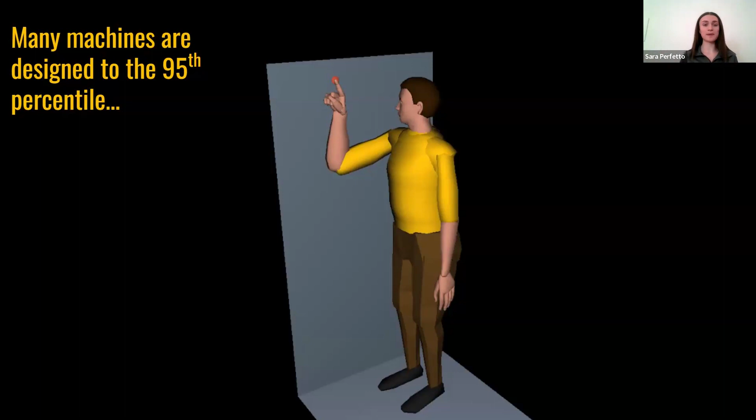Now, a lot of machines in the mining industry are often designed to fit the 95th percentile, or the tallest 95% of people. This can be beneficial in ensuring that no one's going to hit their head when getting into a machine. Issues start to arise when we have operators who are a little bit smaller than this 95th percentile. So on the screen right now, I have an image of a 95th percentile operator reaching a control, that red button you see under their finger.

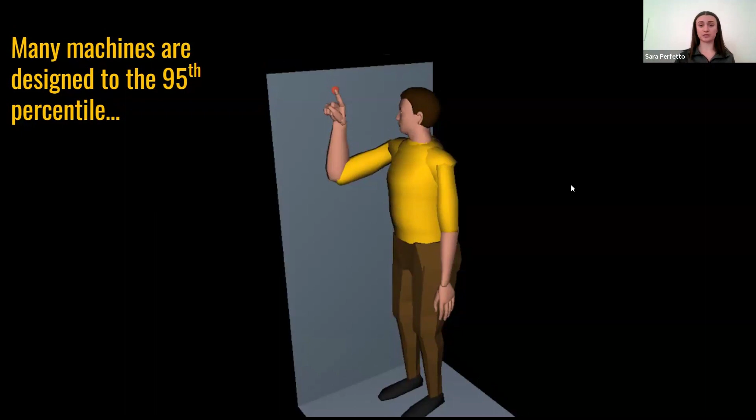As you can see, it looks pretty comfortable and easy for them to reach this control. However, if we have someone who's a little bit smaller, such as the 50th percentile operator, it looks a bit more challenging to reach. And then what about someone who's even smaller, the 5th percentile operator? Suddenly they can't reach that control at all. This concept of how our height affects our ability to reach our controls in our workplace is really what we're going to delve into today.

So the International Organization for Standardization, or the ISO, is something that I'm sure many of us are very familiar with. The ISO is responsible for developing standards relating to testing procedures, working conditions, machine design, and so much more. ISO has developed numerous standards that are recommended to be used in the mining industry.

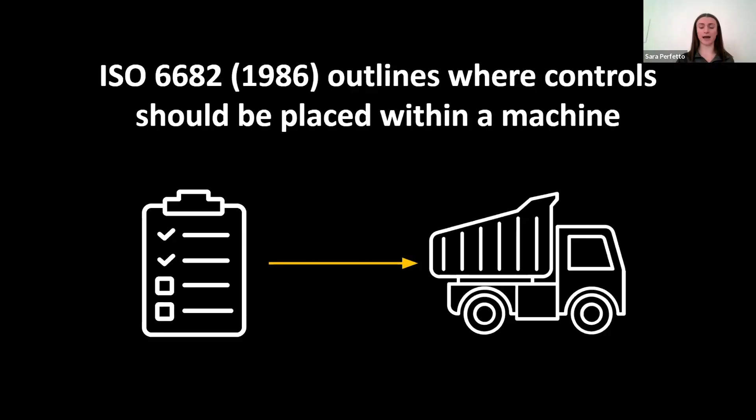One of these includes ISO 6682. This standard outlines the areas within a cab where controls should be placed in order to ensure that the majority of operators can safely and comfortably reach these controls. ISO 6682 does this by having zones in which operators should be able to reach, and they define these zones through the use of a coordinate system where the coordinates lay along the perimeter of these zones.

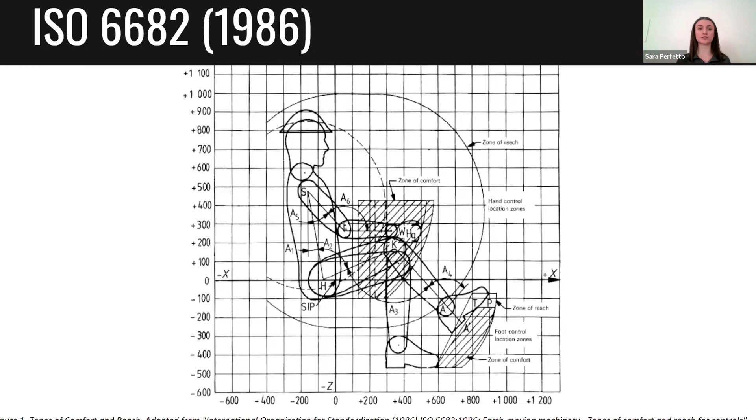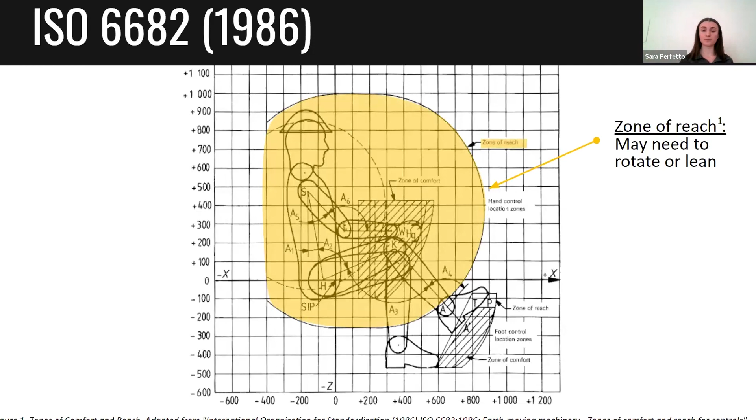So one of the zones outlined in ISO 6682 is the zone of reach. This is the area that an operator should be able to reach with bending or leaning a little bit in the trunk. And the second zone is the zone of comfort. This is the zone that we are going to be discussing today. This is the area that operators should be able to reach without bending at all, and this is where we tend to find controls that we use more often, so things like steering wheels, brakes, and speed controls.

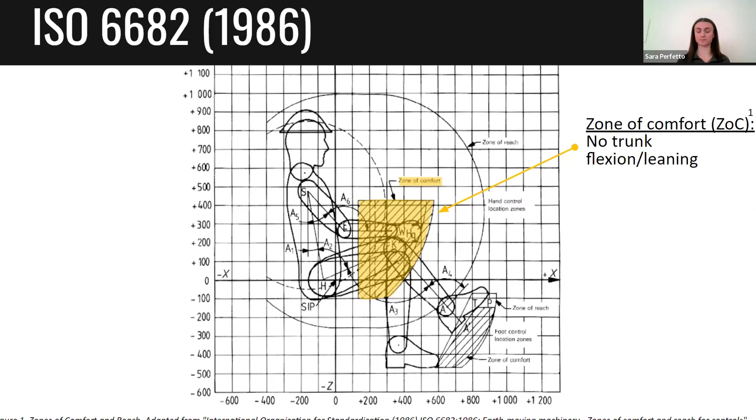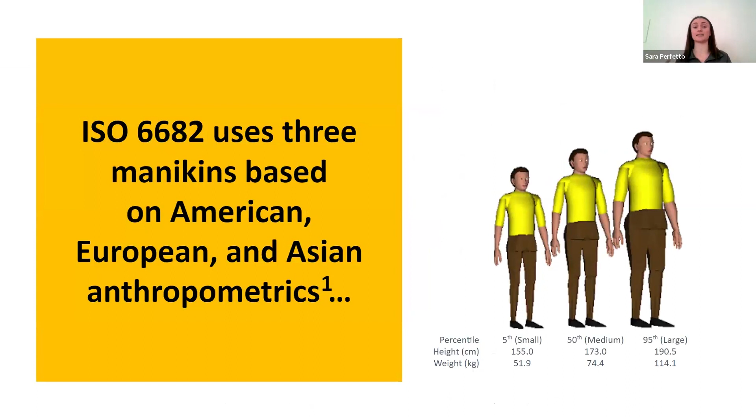Now, ISO 6682 is based off of 3 different operators or 3 manikins. These are shown on the right in the yellow t-shirt, so the small, medium, and large operators. These operators were based off of male and female data from American, European, and Asian populations. However, previous work has found that Indigenous Canadians and Latino individuals make up a large portion of the Canadian working population, and more specifically in the mining industry. When we look at the range of heights used in ISO 6682, the yellow t-shirts, we can see that it might not be the case that everyone is represented within that range of heights.

When we have cabs that don't take a wide range of individuals into account, this creates a barrier to equity, diversity, and inclusion, or EDI. Equity refers to the recognition and elimination of barriers and providing individuals with differing levels of support in order to ensure that everyone has fair and equal access to opportunities and resources. Diversity relates to the mix of representation within a workforce.

It relates to a wide range of aspects, which include, but certainly are not limited to, things like age, sex, ethnicity, sexual orientation, physical ability, and so much more. Finally, inclusion refers to the degree to which individuals of all social classes or social groups have the ability to feel involved, engaged, heard, appreciated in their workplace, thus contributing to an overall sense of belongingness.

Now, when we improve EDI in the workplace, such as through the use of more inclusive standards and cab design, previous work has found that there are numerous benefits to this. Some of these include increases in cultural competency and humility amongst employees. It has been found to improve job satisfaction and sales revenue, as well as promote trust and sense of belonging amongst employees, and improve workplace innovation.

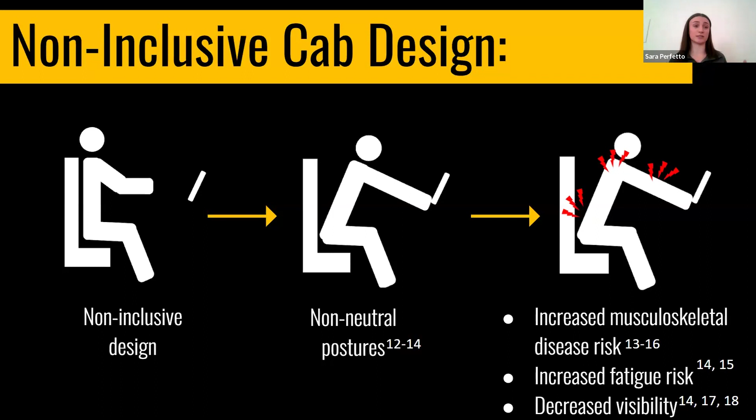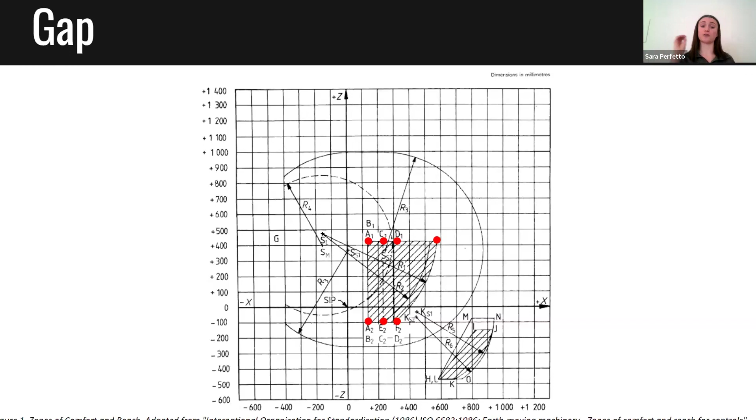So the gap that we really find here is that while ISO 6682 is recommended to be used in the mining industry to determine where controls should be placed within a machine, no work has yet validated the location of the coordinates outlining the zone of comfort in relation to the cabs used in the mining industry, the operators, and the operators' reach envelopes, or what they can reach.

Thus, the study consisted of 3 different objectives. The first was to examine the location of the coordinates defining the zone of comfort in relation to 4 different machines. The second was to compare the location of the coordinates in relation to a variety of operators' reach envelopes. And finally, the third objective was to examine the location of the coordinates with respect to both the design of the cab and the operator's reach envelopes.

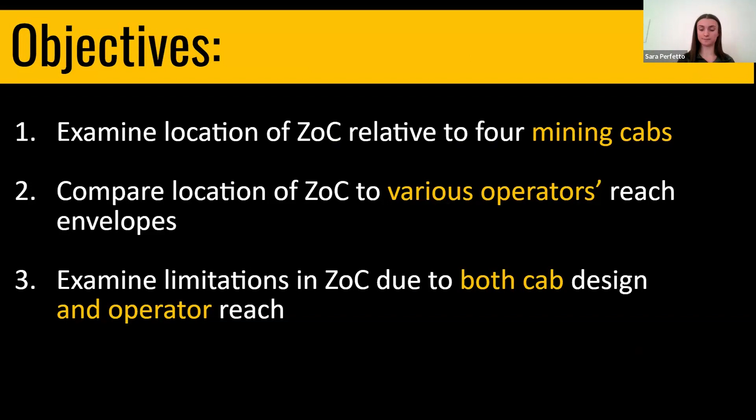So as I alluded to in the beginning, Jack is a human simulation software that can be used to create virtual work environments, as well as little virtual humans, which we call mannequins in Jack. You can place these mannequins into a work environment, have them do a range of tasks, and then analyze how performing that task affects them and their body.

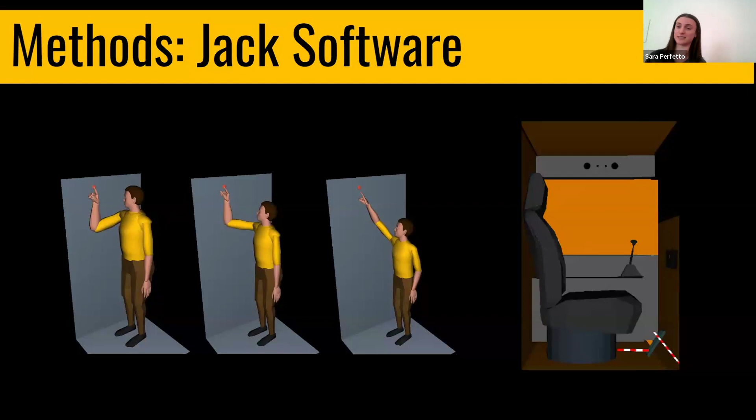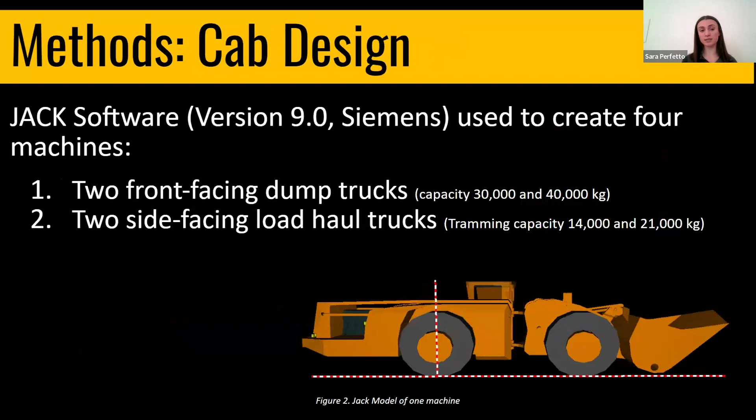This is the software we used for the study, and it's also the software I used for the example in the beginning with the 3 mannequins and the control. Jack was used to create 4 machines for the study, consisting of 2 front-facing dump trucks and 2 side-facing load haul trucks.

Jack was also used to create the coordinates outlined in ISO 6682. In ISO 6682, they outline 12 coordinates on one side of the body, and they say to get the full range of coordinates you just flip the coordinates along the y-axis. So from this point on in the study, there are 24 coordinates, each with either an R or an L at the end to indicate whether it's on the left or right side.

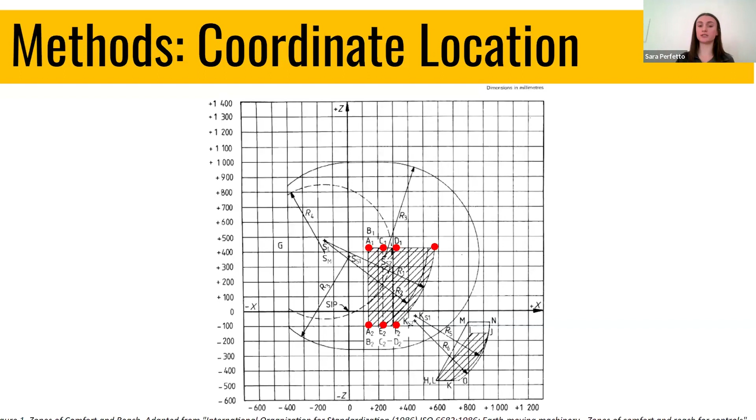In ISO 6682, each of the coordinates is defined as its distance from a certain point, the seat index point. So in Jack, we could go in and define the seat index point as coordinate 0, 0, 0, and then place each of the coordinates at their defined distance from the seat index point.

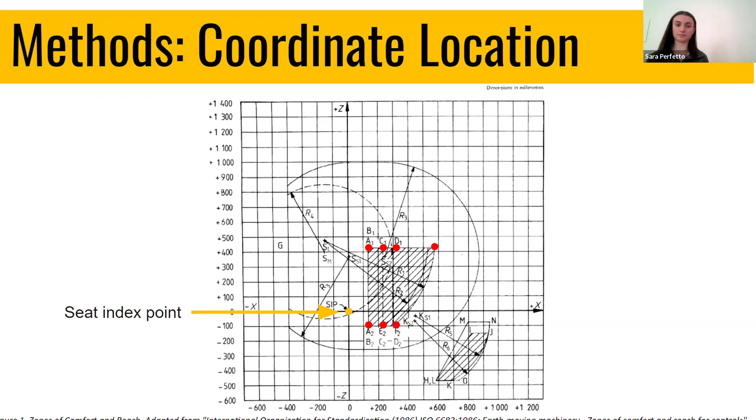The study examined 5 different operators, or 5 mannequins. These include the 3 ISO operators, the small, medium, and large operator, which correspond to the 5th, 50th, and 95th percentile. We also included the 5th percentile Latino and Indigenous females, because when we look at the range of heights included in ISO 6682, these 2 are the only ones within the sample that don't fall within that range of heights.

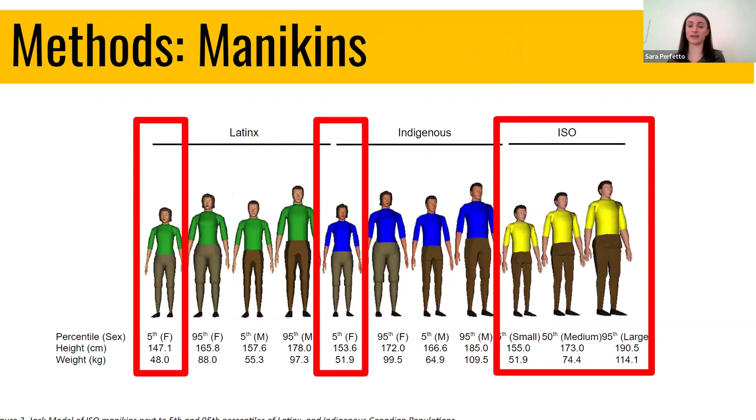For many of us, when we get into a cab or a car, hopefully one of the first things we do is adjust our seat so that everything's comfortable and we can reach things. We wanted to ensure that the manikins in this study were placed in a way most representative of what would occur in real life.

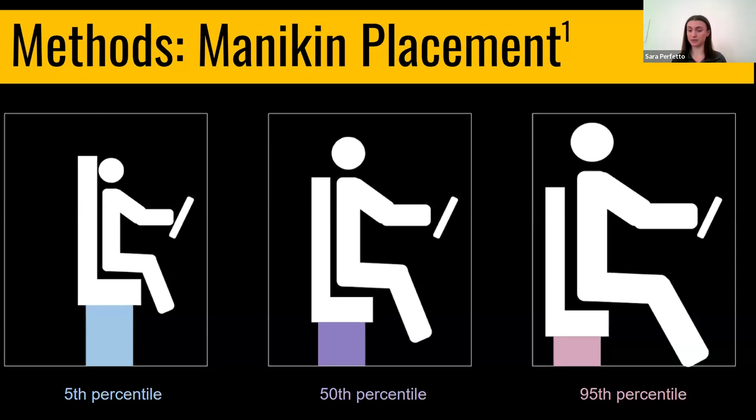To do this, we adjusted the position of the seat based on distances set in ISO 6682. For the 5th percentile operators, the smallest in this study, the seat was set to the highest and foremost position. For the 50th percentile operators, the seat was set to the centermost position. And for the 95th percentile operators, the largest used in this study, we set their seat to the lowest and rearmost position.

Just as a refresher, objective 1 was to examine the location of the coordinates defining the zone of comfort in relation to 4 different cabs.

To do this, the coordinates were first loaded into Jack. This is a side view of the coordinates, and they are layered behind one another, which is why you can only see 7 of the coordinates and not 24.

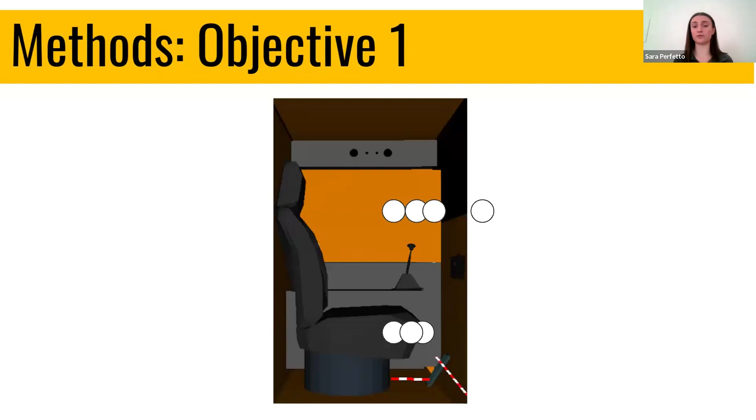Then we loaded one of the 4 cabs into Jack, and the coordinates were color-coded manually based on their location. If a coordinate fell fully outside of the cab, it was colored red. If it fell fully within the cab, it was colored green. And if it was partially in, partially out, it was colored orange. This was repeated with all 4 cabs.

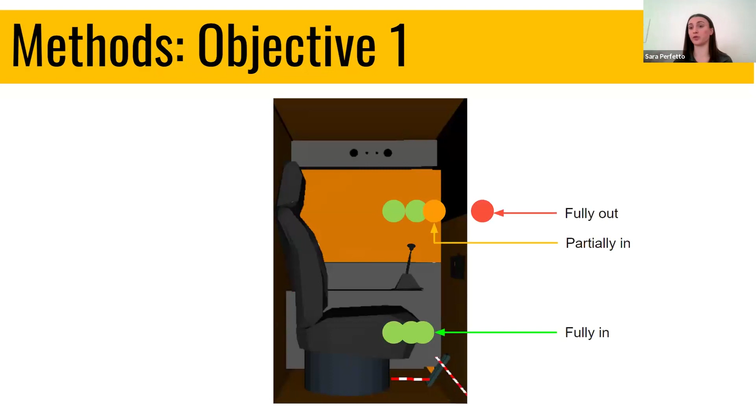For objective 2, we examined where the coordinates fell in relation to 5 different operators' reach envelopes. Once again, the coordinates were loaded into Jack. This is the front view of the coordinates, followed by an operator in the reach envelope, shown as the green circles on the screen.

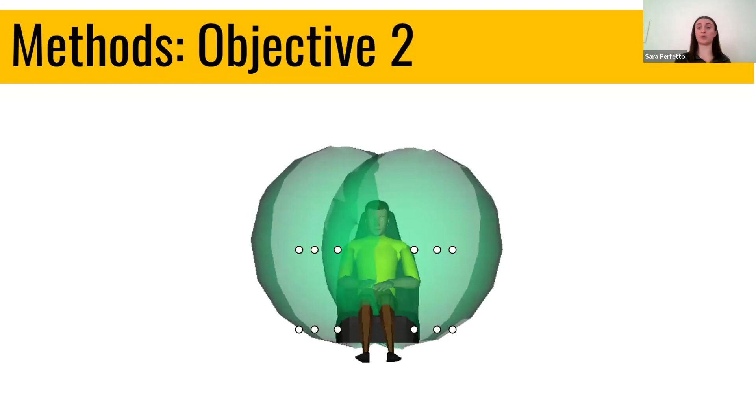This is generated through the reach analysis toolbox in Jack. The green space represents the area an operator should be able to reach based on typical joint angles and a typical arm length for someone of that height. Once again, the coordinates were color-coded based on their location.

This step was repeated twice per manikin: once without allowing them to bend or flex at all, and then a second time where they were allowed to bend either forward or sideways 20 degrees.

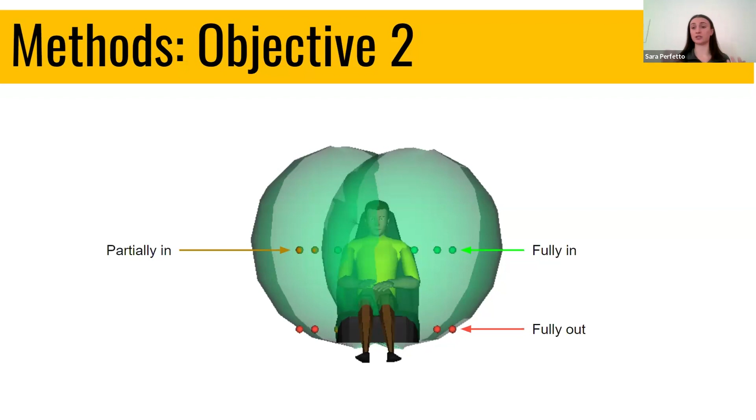For objective 3, we looked at where the coordinates fell in relation to both the cab and the operator's reach. Once again, the coordinates were loaded into Jack, followed by 1 operator, 1 cab, and their reach envelope, with everything color-coded based on location.

In each of the 4 cabs, this was done for all 5 operators, and each operator did this twice per cab.

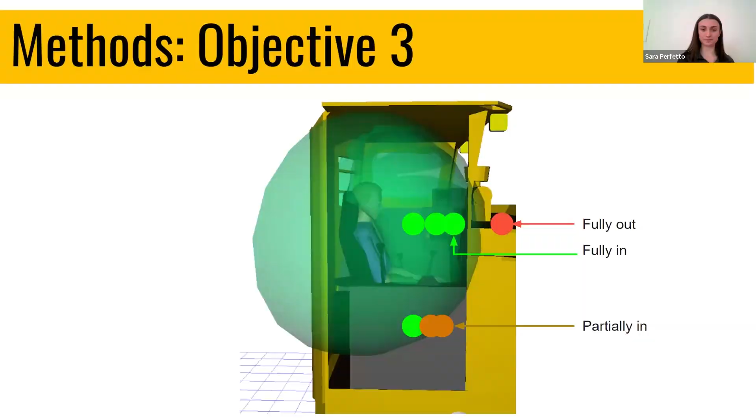When we move into the results, I want to hear the audience's hypotheses. For the first objective, across all 4 machines, what do you think was the highest percentage of points located within a cab, where these coordinates fell fully within the cab?

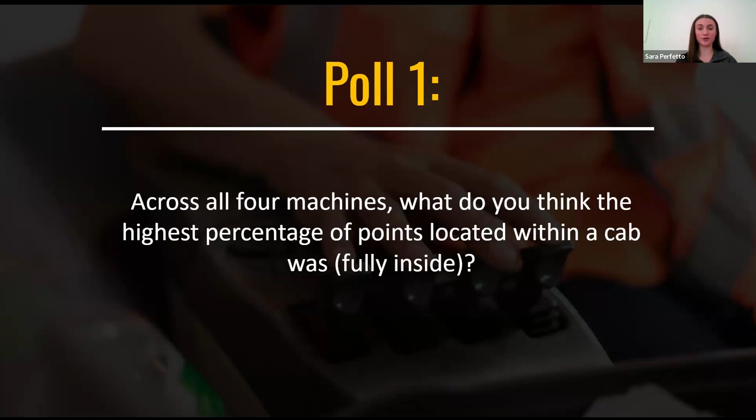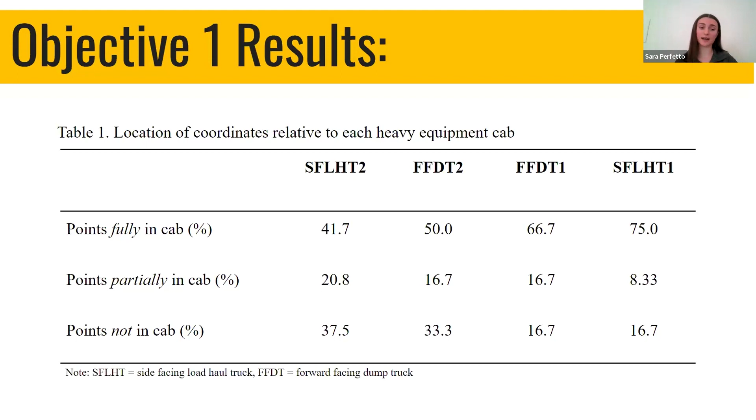Here I have the results for objective 1. Along the top, I have the 4 different machines: the side-facing load haul trucks and the forward-facing dump trucks. Along the left-hand side, I have the 3 different categories the coordinates could have fallen within.

When we look at the amount of coordinates that fell fully within the cabs, we see that the highest percentage occurred in one of the side-facing load haul trucks, where 75% of the coordinates fell fully within the cab. This amount decreases to roughly 42% for the other side-facing load haul truck.

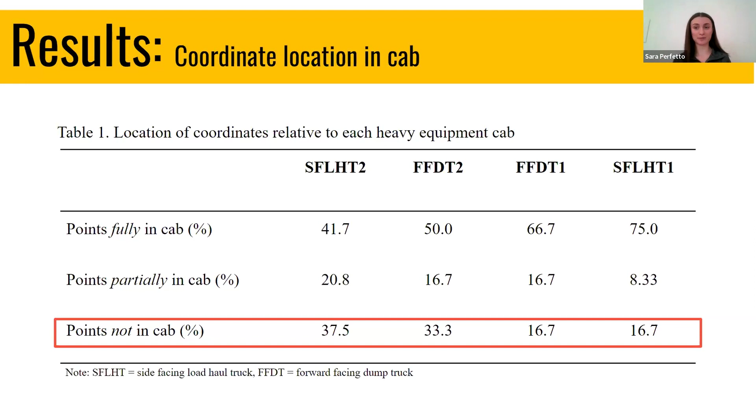However, what I really want to bring your attention to is that none of the cabs had all of the coordinates located fully within the cab, or even partially within the cab. This means that without even taking the operator and the reach into account, it would be impossible for an operator to reach the entirety of the zone of comfort in one of these 4 cabs, because part of the zone of comfort falls outside of the cab.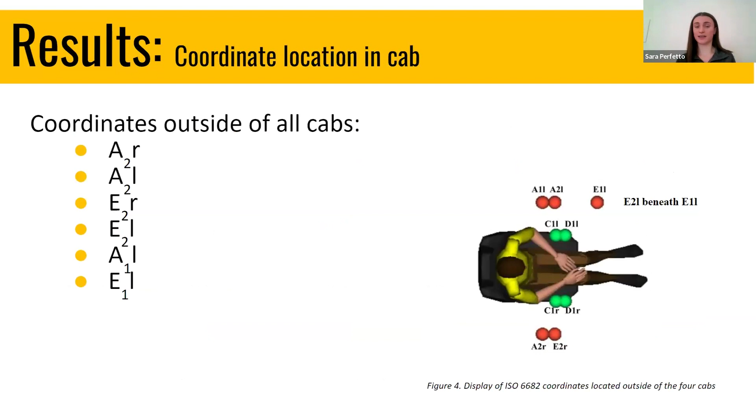There were 6 coordinates that consistently fell outside of all of the cabs. These coordinates have been highlighted on the right in red.

Moving into objective 2, which operators do you think were able to reach all of the controls, either partially or fully, without flexing or bending?

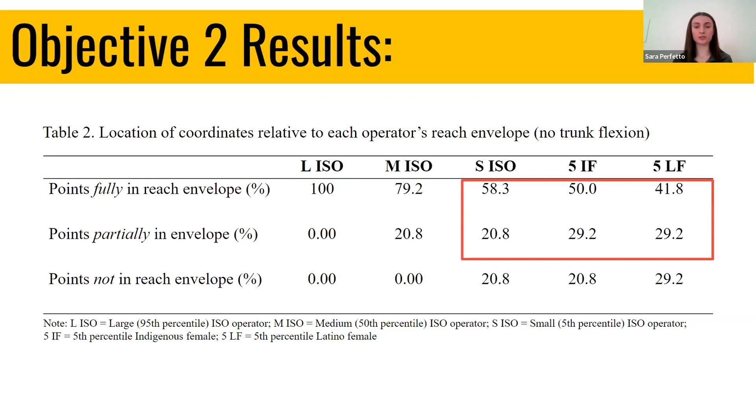All right, so once again, I think you guys got a preview. Most of us hypothesized that only the medium and large operators could reach the entirety of the zone of comfort. So I'll bring up the results for objective 2. Along the top, I have the 5 different operators. Moving from left to right, I have the large, medium, and small ISO operators, followed by the 5th percentile Indigenous female and the 5th percentile Latino female. Along the left-hand side, we have the 3 different categories. Only the large operator could fully reach 100% of the coordinates, and the medium operator could either fully or partially reach all of the coordinates. However, this was not the case for the 5th percentile operators, and I'd like to point out that this also includes the small ISO operator, who is included in the development of this standard.

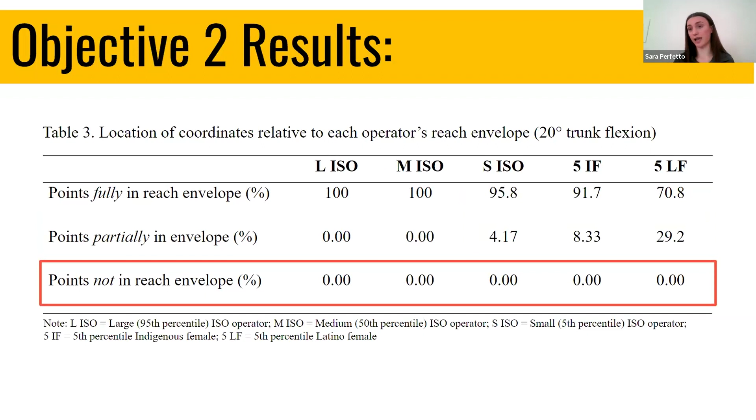When we allow the operators to bend or flex 20 degrees at the trunk, it actually becomes the case that all of the operators can either fully or partially reach all of the controls, and there are no coordinates that fall fully outside of the reach envelope for any of the operators when they're allowed to bend.

For objective 3, we had to classify the coordinates a little bit differently just due to the combination of both the cab design and the operator's reach. For a coordinate to be deemed fully accessible, it had to fall fully inside of both the cab and the operator's reach envelope. For a coordinate to be considered not accessible, it had to be fully outside of either the reach envelope, the cab, or both. And then any situation that fell sort of in between those two descriptions was deemed partially accessible.

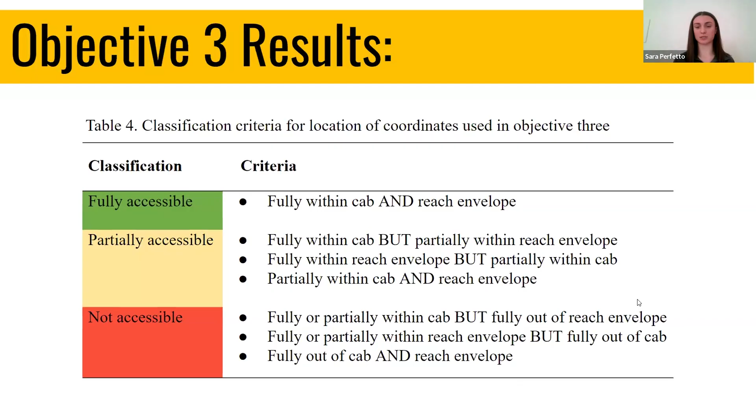Here I have the results for objective 3. Along the top, once again, we have the 4 different machines, and then within each of the machines, we have the 5 different operators. Along the left-hand side, I have the 24 different coordinates, and these are the results without any flexion or any bending for the operators.

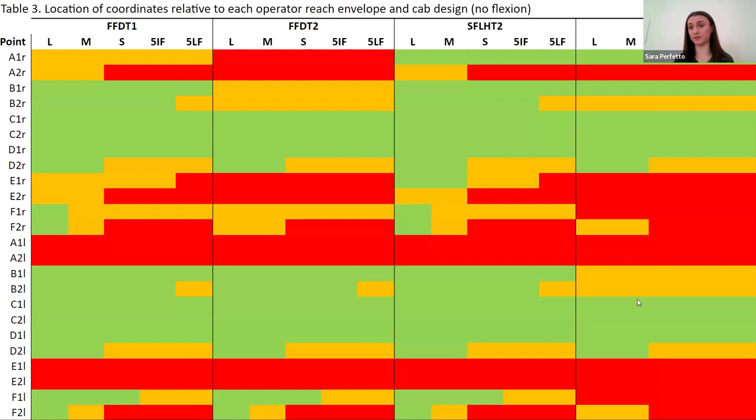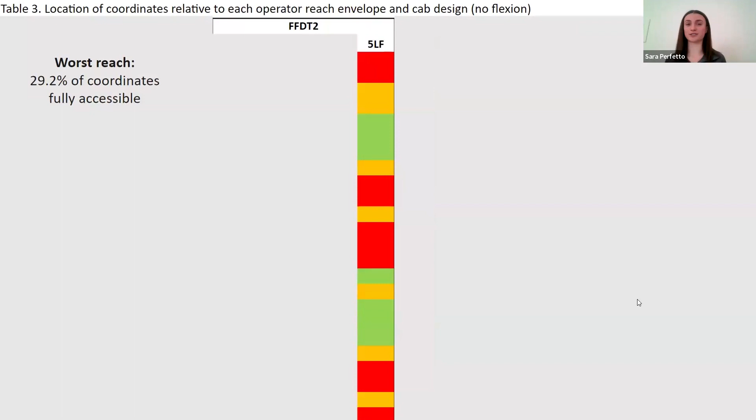When we look at this table in terms of columns, you can see that there's no column in which the entire column is green. This means that without flexing, there's no condition that exists in the study in which an operator could fully reach 100% of the coordinates of the zone of comfort. The absolute best reach occurred in the side-facing load haul truck for the large ISO operator, where they could fully reach 75% of the coordinates. The poorest reach occurred for the 5th percentile Latino female, and they could only fully reach roughly 29% of the coordinates. And when we look at this column here, it's quite striking just how little green there is in this column.

Here I have the results when we allowed the operators to flex, in numerical form. Once again, we have the 4 cabs along the top, the 5 operators underneath, and then the 3 categories along the side. What I'd like to point out is that within each cab, the amount of points that are not accessible to the operators becomes universal in the cab, and this is really a reflection of the cab's design. We saw that in objective 2, when we allow the operators to flex or bend, such as in this situation, they can reach the entire zone of comfort if there's no barriers caused by the design of the cab.

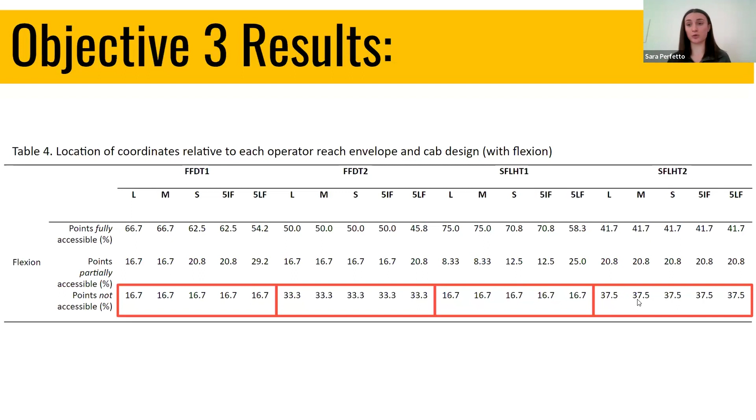So what do these findings mean, and what are the implications of the results of the study? From objective 1, we found that there was no cab that housed all of the coordinates defining the zone of comfort. There were 6 coordinates that consistently fell outside of all of the cabs. This suggests that current cabs are designed in such a way that they're too small to account for the entirety of the zone of comfort. This suggests that future cabs that are developed should be enlarged in the areas of the red coordinates in order to ensure that the entirety of the zone of comfort falls within the cab.

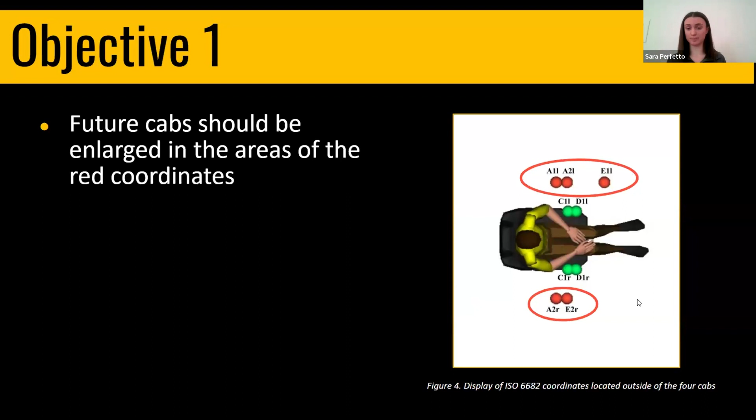From objective 2, we found that ISO 6682 is actually only ideal for the 95th percentile operator because they're the only operator who can reach the entirety of the zone of comfort without needing to bend or flex at all.

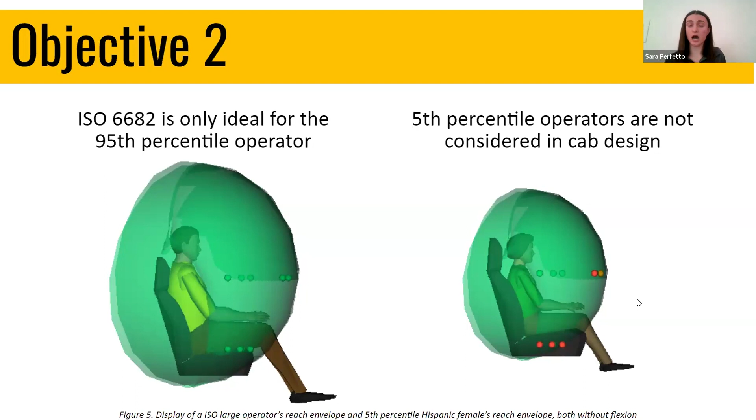The 5th percentile operators all needed to bend or flex in order to either fully or partially reach the entirety of the zone of comfort, which suggests that they actually might not be considered in the design of cabs. This creates a barrier to safe and efficient work for shorter individuals in the field, or individuals who are of the 5th percentile.

Future cabs that are designed based off of ISO 6682 should take the findings of this study into consideration to determine where we should and shouldn't place controls.

We should aim to place controls near the coordinates that tend to be accessible to most operators. These would be the green coordinates, and we should avoid putting controls near coordinates that are not accessible to the majority of operators, the red coordinates you see along the bottom.

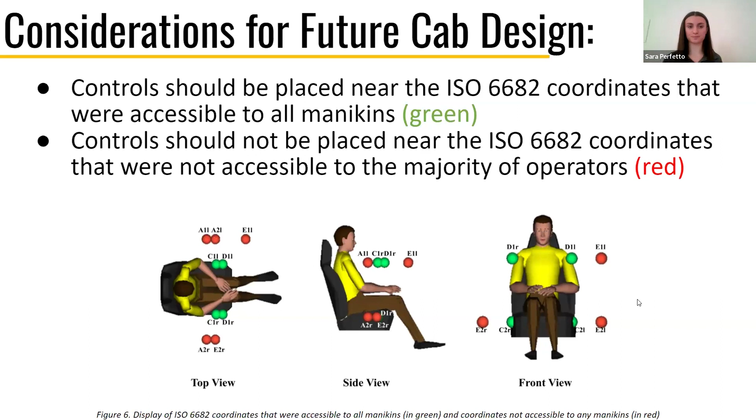Some previous research has found that in some cabs, emergency controls, such as emergency brakes, are actually located out of the operator's reach. This study has expanded on these findings by demonstrating the specific regions in ISO 6682 where controls should not be placed because they're the areas that the majority of operators cannot reach.

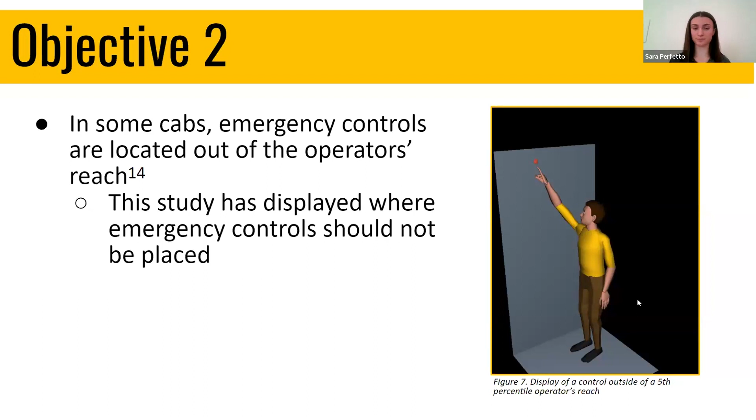In the study, we also found that the reachability of individuals who are not commonly included in standards in previous research, such as the 5th percentile Indigenous female and the 5th percentile Latino female, is even poorer than those who are included.

This suggests that these operators would need to adopt an awkward, non-neutral posture in order to reach the entirety of the zone of comfort, or all the controls they need to do their job. And adopting these postures places smaller individuals at a disproportionate risk of developing musculoskeletal disorders in the workplace.

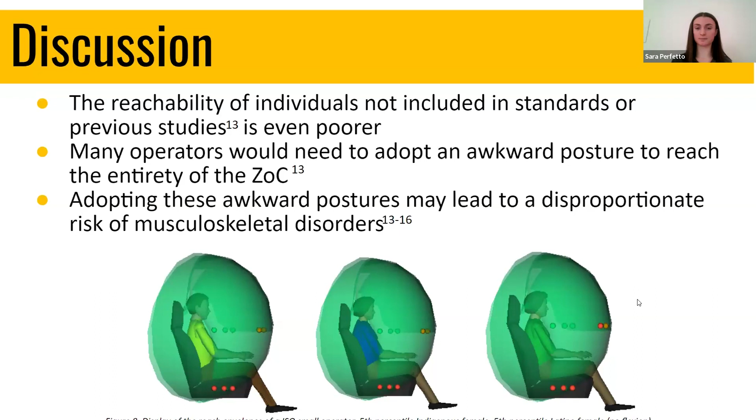Future work really needs to make an effort to have more inclusive cab design that takes a wider range of individuals into account. And if we change cab design to make it more inclusive for everyone, this can help limit barriers to diversity in the workplace, help retain diversity, promote inclusivity, and ensure that certain individuals are not disproportionately affected by the design of cabs.

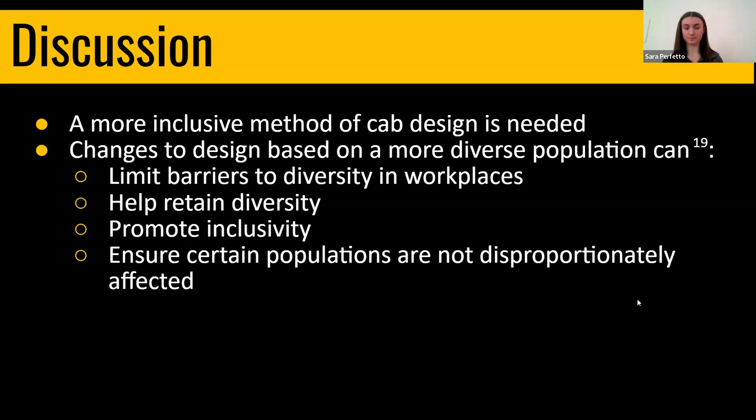Future research should use the same methodology that was used in this study on machines in other industries that have been identified as having comfort or safety concerns. This includes tractors, trams, and excavators.

ISO 6682 also outlines a zone of comfort for foot controls and the zone of reach, which we discussed at the beginning, for hand and foot controls. The placement of these coordinates should also be validated using the same methodology used in this study.

The findings of the study also really emphasize that ISO 6682 needs to be revised. When we consider the findings from Objective 2, where we look at the reachability or accessibility of ISO 6682 in regards to just operator reach without considering cab design, we found that it's only ideal for the largest operators and doesn't take the smallest operators into consideration.

Finally, future work could examine if reconfigurable cab design, or designing cabs in a way that the controls are adjustable, can help improve accessibility and reachability for a wider range of individuals.

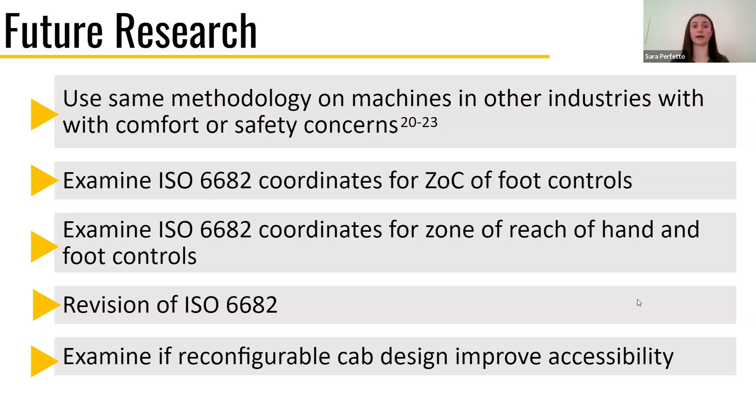There are three key takeaways that I really hope everyone leaves with today. The first is that cab design needs to be more inclusive and include a wider range of individuals. The second is that future cab design needs to take the findings of this study into consideration to determine where we should and shouldn't place controls.

And finally, ISO 6682 needs to be revised in a way that includes more individuals, to make working in the mining industry safer and more comfortable for a wider range of individuals.

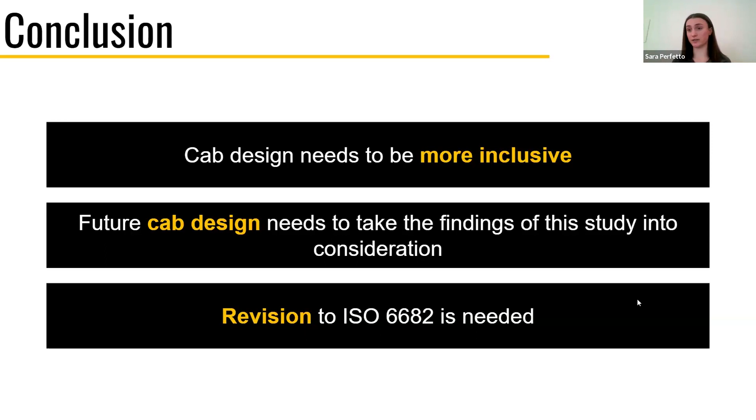Boy, another great presentation. Thank you so much, Sara. I have a couple of questions, if you don't mind, as we're waiting for anybody else to put a question in the Q&A.

As you know, industries are understaffed. A number of them are putting in efforts to recruit more women into what have been many industries that are predominantly male dominated.

What does this mean for them? Yeah, it's a really good question. When we look at anthropometrics and bodily proportions of individuals, usually females tend to be smaller. Now, ISO 6682, the standard we discussed today, does include the anthropometrics for females. However, it is still missing the anthropometrics for Latino and Indigenous females. So it's very important that we consider females of all ethnicities, in order to ensure that controls are accessible for everyone.

Yeah, I mean, you hear stories where workers are challenged. I have another one, but I see Mark has a question too, so I'll read his question for you. Mark Seguin asks, how do you redesign a scoop when it could make production slower and or make more blind spots? Yeah, that's a good question. Cab design is a really intricate process, and this is just one of many factors that need to be considered. A lot of times the design of the cab is one of the last thoughts, and I think the findings of the study need to be considered earlier in the design process, along with other factors like visibility and the efficiency of the machine.